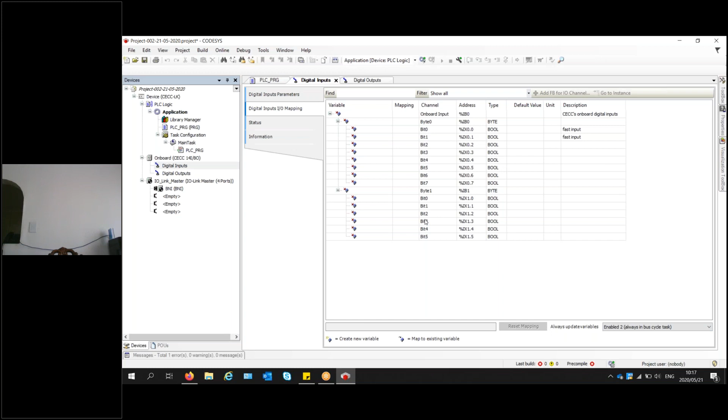What is important is that we need to select here enable 2. This is so that when we are logged in online, we can see the state of all the inputs, whether it's false or true, because otherwise by default it won't update unless such variable is used in the program. So we need to do the same thing with the outputs. Also under the remote IOs, we need to do the same thing. Enable 2. Now, the next step is also very important. You need to add symbol configuration.

Usually after adding symbol configuration, it requires you to build. Now, this is very, very important. You need to tick both of these here, constant and IO config globals. And also you need to go to settings and enable direct IO access. This is so that CIROS can access the onboard IOs of the PLC and also basically all the physical IOs. Okay, maybe I shouldn't use the word physical. Let us say all the IOs in the project with addresses.

Okay, so I'm just gonna leave it like this for now because I want to make sure that my communication is 100% before I start writing the program. At this point, I will start CIROS Studio. So this is what you must also note, actually, is that OPC, it is part of CIROS. After installing it, you don't actually need to do any settings, except for one, and this is one time. You need to set up here, Codesys settings, you need to select which version of Codesys you're using. Once you've done this, you don't need to come back every time and change it.

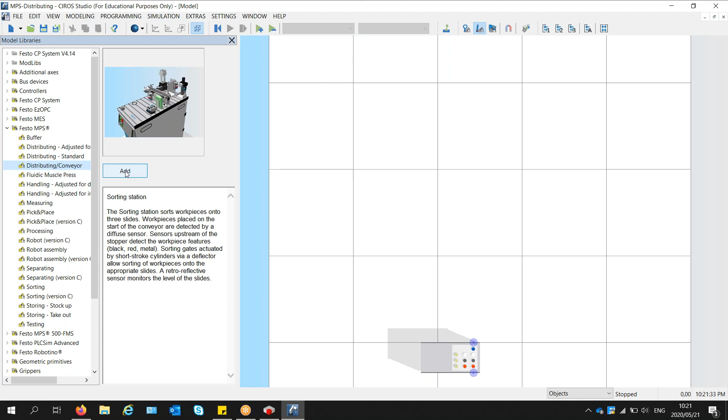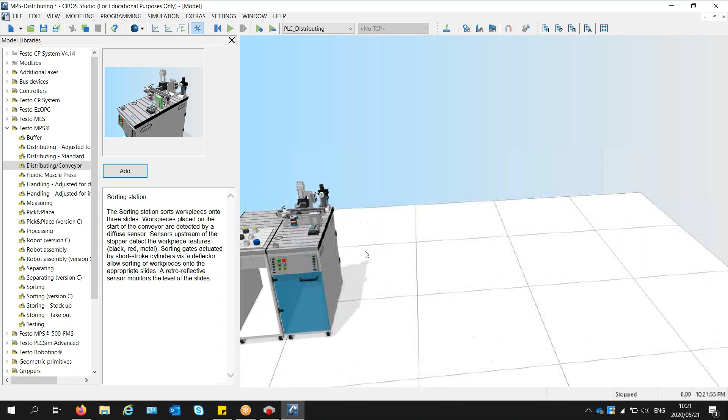So this is the model library. This is where you select which models you want to have in your project. Sometimes it's not shown. If it's not showing, you go to models and you can go to model libraries, and then it pops up. And now these are all the different things that you can add into your project. For the purposes of today's webinar, we're going to add the basic MPS station, which is the distribution conveyor. Okay, this is the distributing conveyor, and this is my work table where I will select the different materials to load into the magazine.

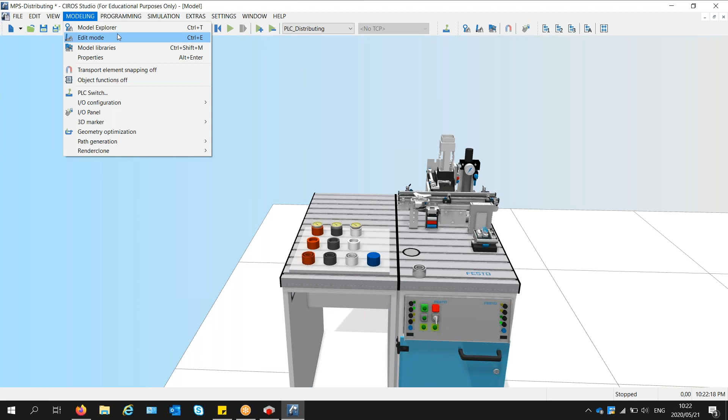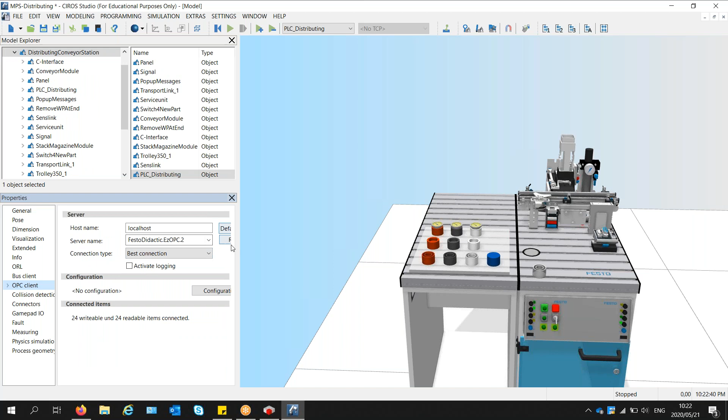All right, and now we need to go to the model explorer, and we need to go to objects. We need to go to distributing conveyor, the station, and PLC distributing. We need to go to properties of the PLC, and we're going to change this to OPC client. When you do that, this will then pop up under general. You need to go here, localhost, and here you need to select Festo EZOPC2, what is showing. Sometimes it's not showing anything. If there's nothing there, you need to refresh and you will have all the different things to select.

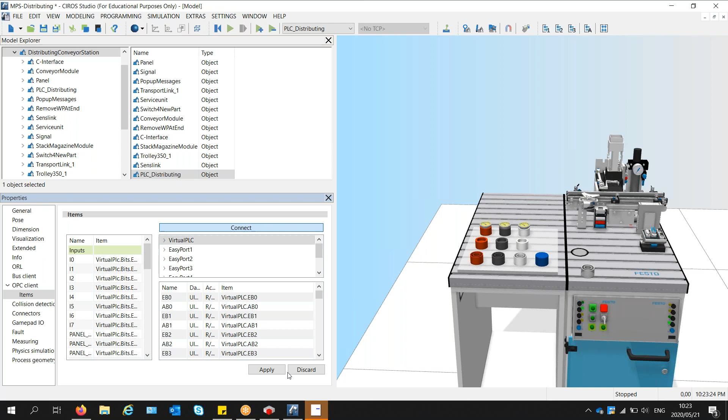Now, if EZOPC is not installed, it will not be an option here, which means that you will not have communication to Codesys from CIROS. So you need to install EZOPC, only then these options will be visible. Now, it's important that you select the correct EZOPC here, which is 2. And from there, you need to open here, go to items, and then you need to connect. You will see immediately when I click on connect, EZOPC will pop up, and apply. And that's it. Luckily for you, that's all you need to do pretty much in CIROS in terms of configuration. So let's run.

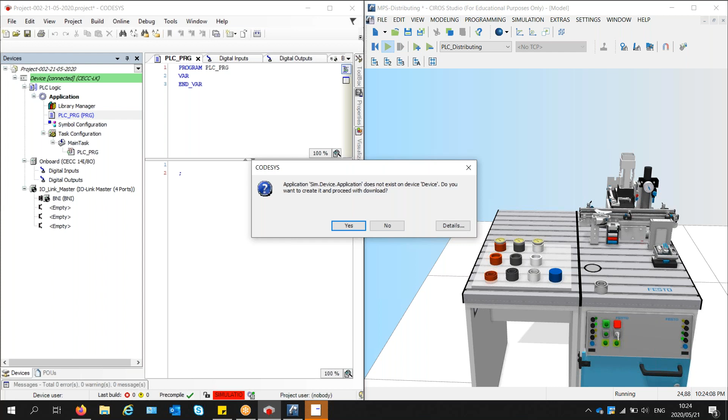In Codesys, what you must do also, you must turn on simulation. Once you've turned on simulation, you can then log in. Because as I said, we're not using any hardware. So by turning on simulation, it simply means that we are using the internal PLC controller of Codesys so that the project is loaded there instead. And then from here, you can run the project. So it's running. Let us see here.

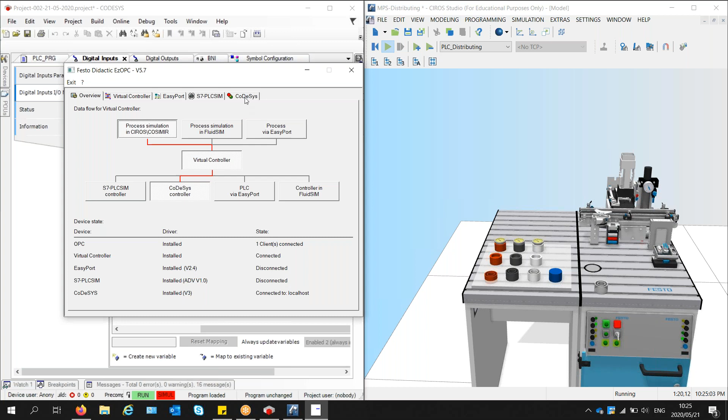Now, if this was communicating, already there are some inputs that are on the station. So I can tell immediately that there's an issue somewhere because none of the inputs is actually on. So I need to figure out why this is. So we're going to open EzOPC. It does show that Codesys is connected and we have one client. In this case, this is CIROS. So I'll go to Codesys and you can see that there's nothing. Virtual Controller, there's nothing. All right. I'm going to try to turn on an output to see if it will get to the station. Let's see.

There is communication, because you see that as soon as I turn on output number 4, the ejector came out, it extended. Let us check inputs again. Okay, there is something here, something has turned on. All right, perfect.

Okay, now this is where it gets interesting, because if we're going to write a PLC program, we need to declare our variables. We need to know what sensors we have. We need to give them titles so that when we write our program, we don't refer to addresses in our program. This is a very important thing to do.

Now for outputs, it's very simple, because you just turn them on one by one and see which is responding. So in this case, I've seen that as soon as I turned on output number 4, the ejector came out. So I'm gonna make it false here. What have I done? This is inputs. Okay. We need to go to outputs and we need to make this false. So this is output number 4.

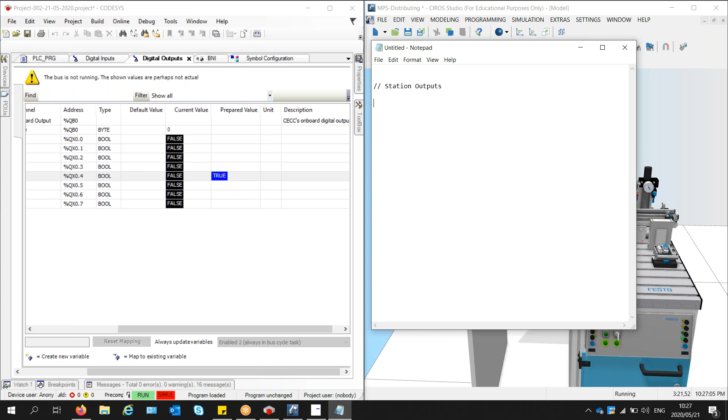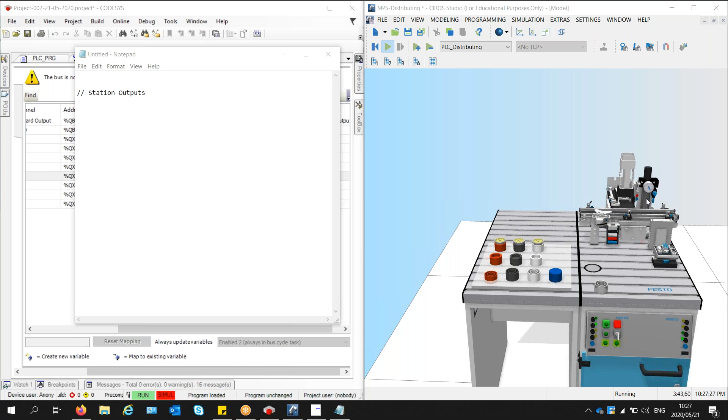The first which I've identified is the ejector. So you can use the term ejector, or you can standardize and use the similar terms which are used in CIROS in terms of the labels, which are also printed on the physical outputs themselves, which is something I recommend, because this is going to be very helpful if you're going to be doing any troubleshooting in the future.

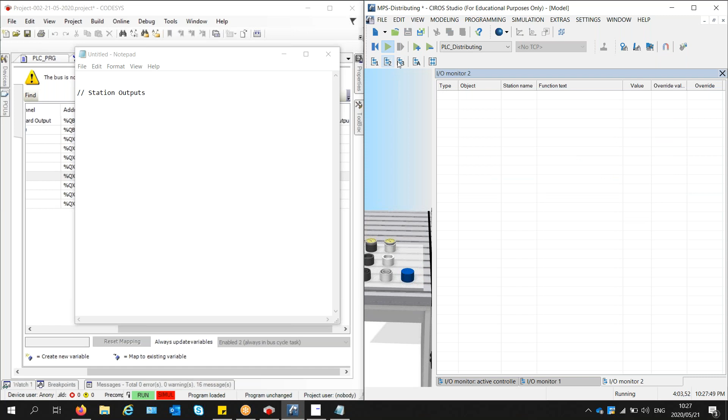And also, these are the same terminologies that are used in the circuit diagram of the station. So you can see immediately why I'm saying what I'm saying. So you can see those labels that I'm talking about, these G1, BG1. So this is something I recommend for you to use. But in this case, our outputs are not given labels, are not physical in CIROS. So if you want to get those labels, the student would need to refer to the circuit diagram.

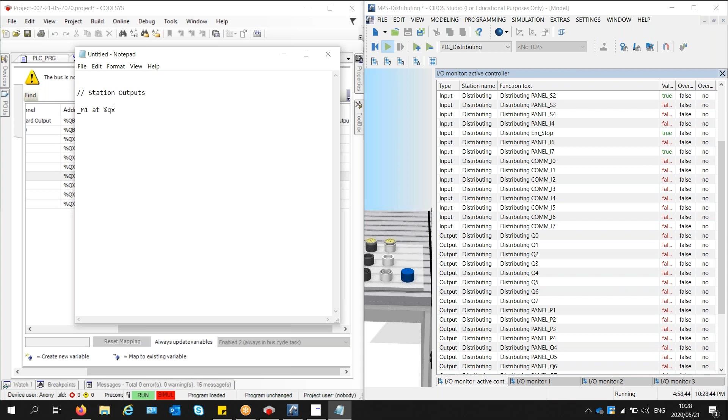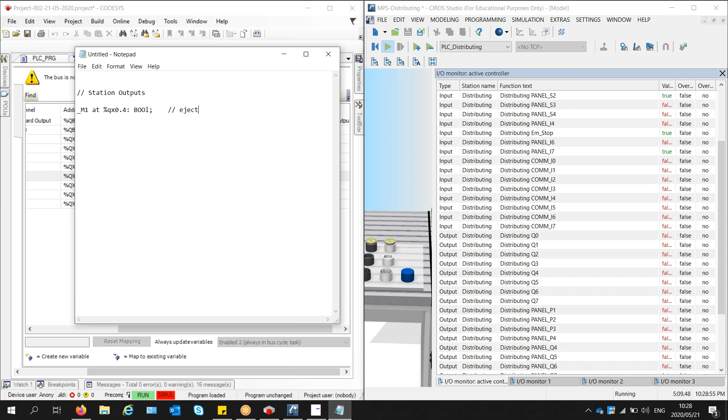But to not make my story too long, I will skip that, and I'm going to say M1, for instance, for the ejector. Okay.

Let's see what other outputs we can find. So 0 is actually a conveyor, but we can't see anything because we don't have any material on the station itself. So I'm going to load a workpiece and eject it so that we can see if indeed output number 0 is the conveyor. So you can see that the conveyor runs forward when I turn on output number 0. So I will write it here. I'll use K to refer to motors and M to refer to valves or solenoids.

Okay, so we've seen the conveyor running forward. I'm going to turn it off, turn on output number 1, turn it off. There's nothing there that we can see. So let's turn this on. Output number 2 is the gate. So this is the gate here.

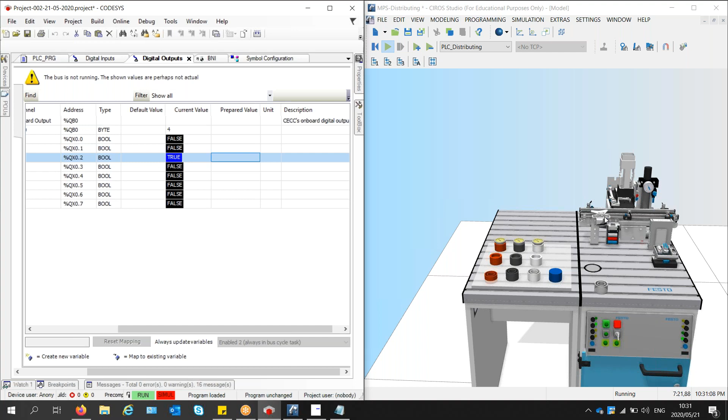We don't even need to include it in our program because it will not have any effect, but I'm going to declare it anyway. So that is output number 2. Looks like I forgot X here. Stopper. Okay.

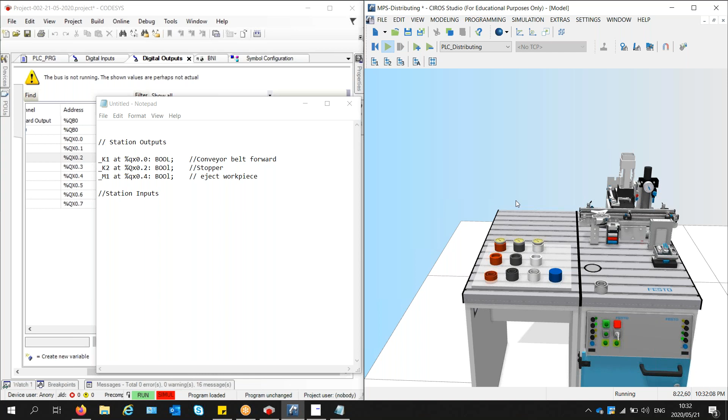So for the inputs, like I've mentioned in the previous session, it's very tricky to identify inputs with the station, because it's not like with a real station where you can go physically, place the workpiece, have it stop there and observe which sensor is turning on. So that is the reason why, if you look here, the labels of each input are shown to the students. But for the outputs, it's not shown, because this is part of them learning how to identify the different variables. So inputs are here.

So I'm just gonna type them in here quickly. And we have G1, BG1, in capital letters, which in this case would be at address 0. So the first input here would be address 0, then address 1, 2, 3, 4, 5, 6, and 7. All right, so this will be at %IX0.0, and this is a Boolean.

And so this is a comment. Let's say beginning. So we also have G1, BG2, which is workpiece at middle.

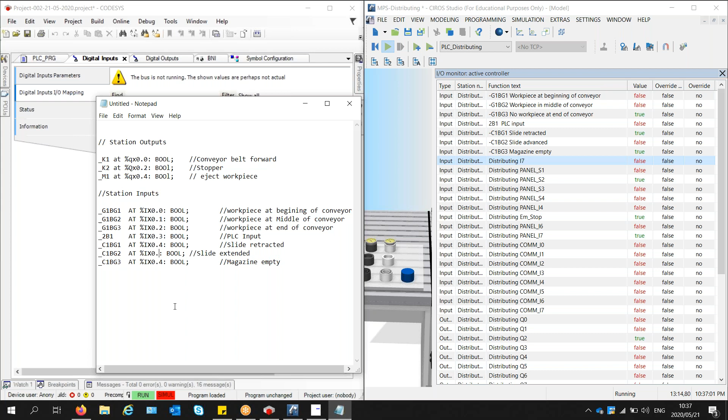So we have C, what have I done? We have C1 and BG2. Tab, paste, and this is slide extended. We have magazine empty also, which is going to be C1 BG3. There we are. So I'm going to stop here in terms of declaring the variables. We will look at the panel later on. Okay, so let me just make sure here. So this needs to be 5 and this needs to be 6. Number 7, I'm going to skip it because it's also a reserved variable.

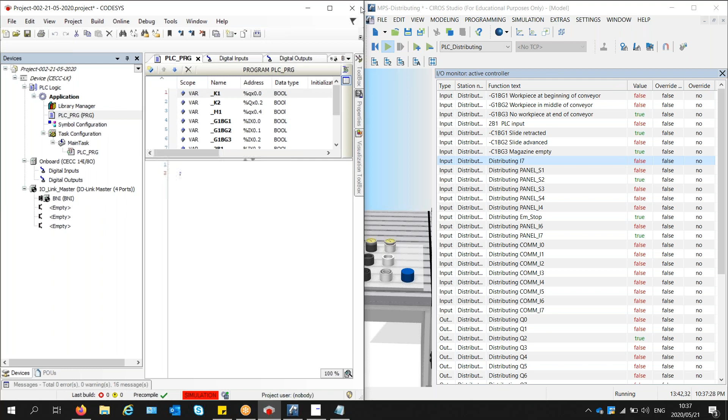That's about it. So I can take these now, and now I can log out. And I can put them here. And so I have conveyor belt. Yes, now I can start writing the PLC program. So I'm gonna just have an internal flag that I'm gonna use to start the system. So that I can have a start.

Now, I hope that you might be familiar with this type of programming. Codesys structured text. It's not exactly the same as the Siemens structured text. There are some minor differences. But if you are not understanding something, I'll be more than happy to explain to you. So we're gonna use steps. This is just to make sure that we don't have clashing signals or interlocking signals.

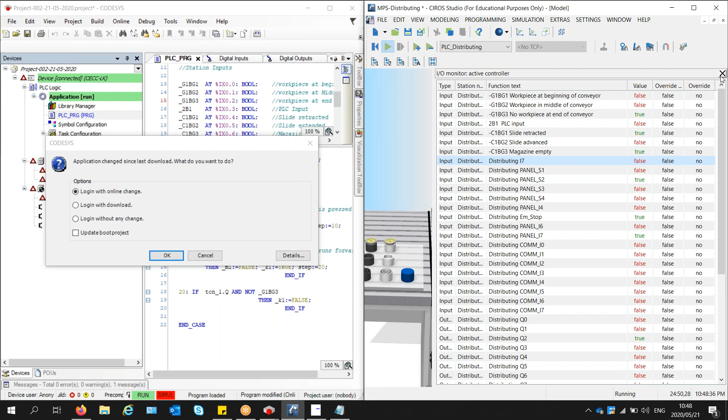The program is complete. I hope that we won't have any errors here. I didn't move these things. This should not be here. Then yes. If then okay. Perfect. Okay, so we will then test this small brief program. So I need to load a workpiece into the magazine.

Okay, there we are. So this is what I meant. You can see that it takes me a while to change the state of a variable. By the time I change start to false, the process has already completed. And if I don't use a trigger, this will become continuous and I can't stop it until I make this false. So the trigger helps me simulate a momentary on-off. And another workpiece will be taken out only after I trigger the process again.

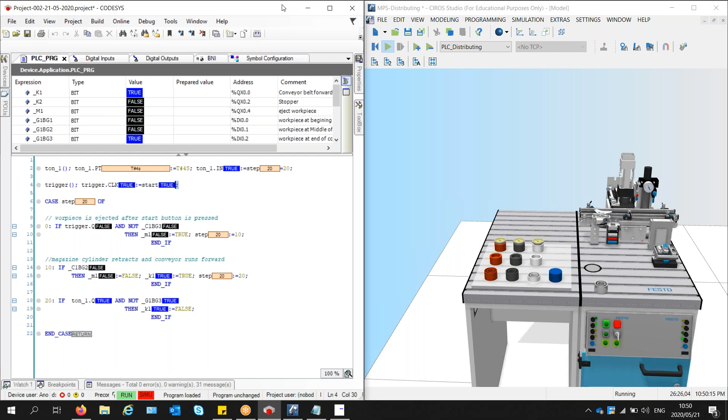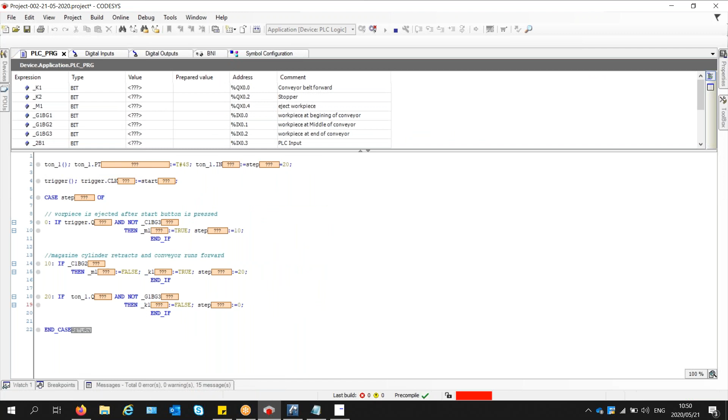It won't start a new process, and this is because it's stuck at step 20, so I forgot to write here that it should jump to step 10 after this. Actually 0. Oh, here we are.

Let me just check under chats. I haven't checked chats in a while now. Well, there's still no new chats.

Now I can continue to declare the variables on the control panel. But I would just like to get a response from you so far. Is everybody good? Is everybody happy? Everything is well explained?

Yes, thanks, Treasure. I still haven't managed to download the software. It's probably because I'm streaming the webinar at the same time. The download is taking forever. But yeah, thanks. It's looking good. It's also good to see Codesys programming. I haven't done that yet. Thank you. Let me continue then.

So I will send you this project after the webinar, and then if you want to check something, you can check so that you're not completely in the dark. As I said, you don't need to make any changes in Ciros, you just open this model, which is the distribution station, and then you go to OPC, you add EZOPC2, and then run simulation, and that's it. So this is really a positive thing.

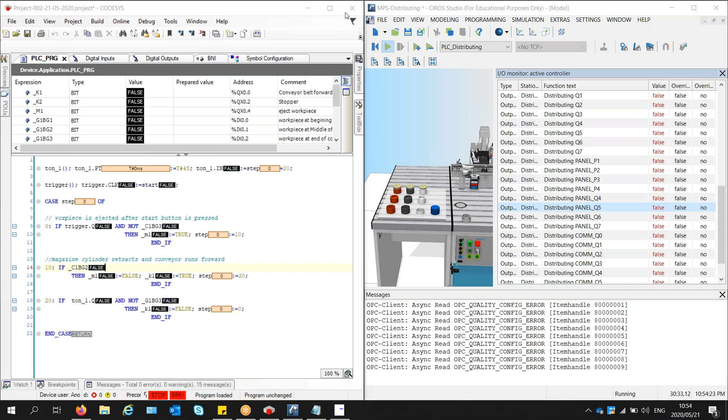These are for communication with other stations so that you can connect via lab cables to downstream and upstream stations. All right, so we will go back to Codesys now to declare these things. So I'm going to log out. Let's start with the outputs, because we started with outputs with the station. And here we have P1 is the first one.

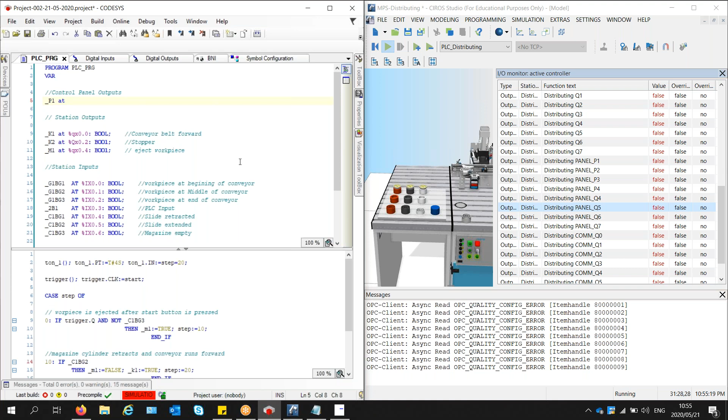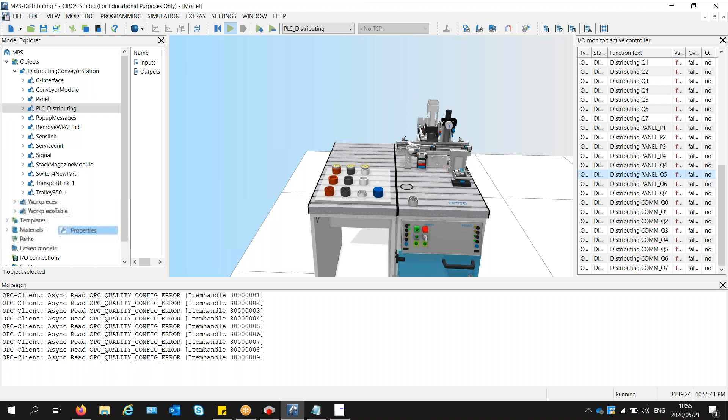So also here, we need to know the address. So before I start writing addresses there, let us verify the addresses of these variables. So I need to go to Model Explorer and PLC properties. Okay, so you can see here S1 is byte 1, bit 0, and so on. So this is using byte 1. Let us confirm also the outputs. So outputs are also using byte number 1. This is good.

There's just only one problem, unfortunately, which I will explain to you in a moment. So now the PLC which we are using comes with 2 bytes of inputs. Now the second byte is incomplete because physically on the PLC itself, we have 1 byte, which is this, of course, with 0 to 7, and we also have byte number 1 with only 6 inputs. Now this is normal because PLCs usually have more inputs than outputs. Usually systems have more inputs than outputs,

and I think it's something. It's a good thing. It's a good thing because you want to listen more than you speak, actually, so that you gather more information before you can make decisions.

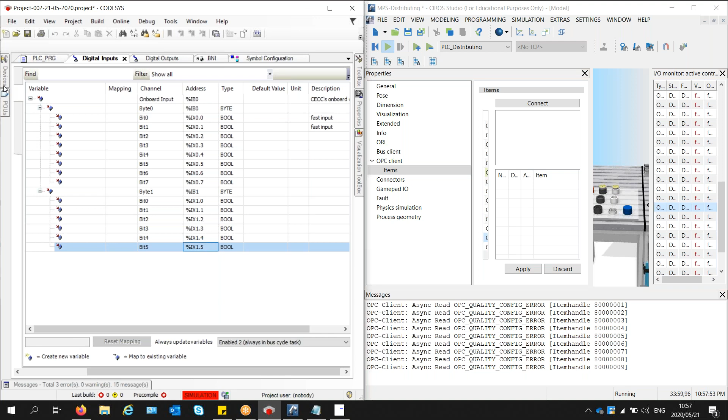Now, this is not good for us because of the fact that we could be having bit 6, bit 7, which we don't have here, right? But for the control panel that we're using, luckily inputs 6 and 7 for this activity we're doing now, we won't need to use them. However, should you find yourself needing to use 6 and 7, then let us see if you have them here.

There's also another reason for having more inputs than outputs. Outputs are expensive, inputs are cheap, simply due to the electronics involved. An input is simply a transistor looking for a voltage, whereas an output often needs to drive power, and the power electronics behind it are a lot more expensive than the inputs. So that's why PLCs usually have less outputs than inputs, and why you need to use expansion boards. Thank you. I didn't know that.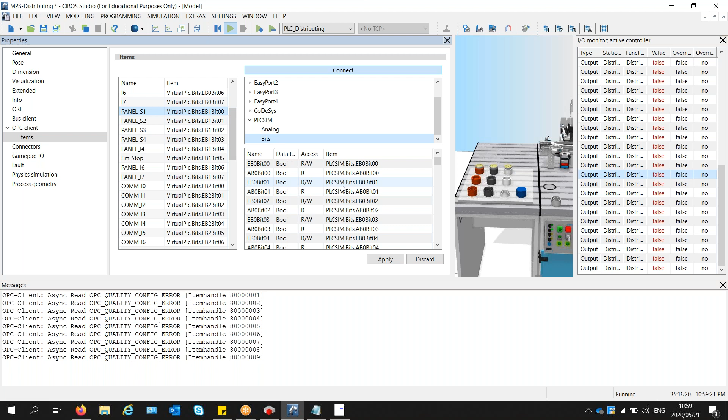So one simple solution I can give you is to change the byte of the inputs of the control panel here. So you can change these to byte 2, because with byte 2 we have complete bits from 0 to 7. So you can do that by going here and coming to bits and just dragging byte 2, bit 0, and dropping it over there. So you can do that. But I think I've emphasized enough on that.

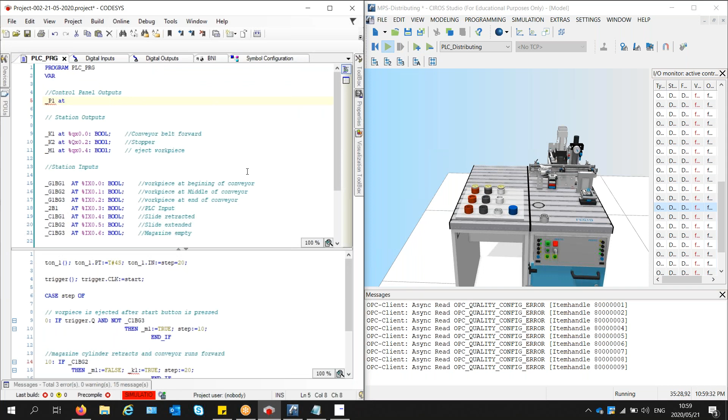Let us continue with declaring these. So P1 would then be the start illumination, which will be at address %QX1.0. This is the first output on byte number 1, and this is of course a boolean or a bit, and this is a start button illumination.

We have P1, P2, P3, P4. So I'm going to change this to 1, 2, 3, and we have start button illuminator. This is a reset button illuminator here, and then we have Q1 and Q2. Now we come to the inputs.

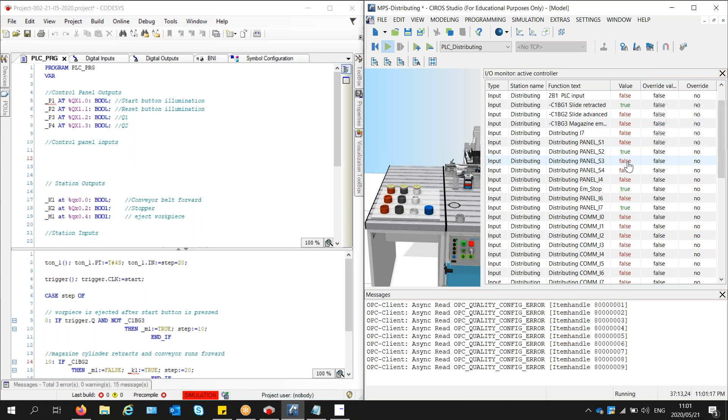So all inputs are labeled S1, S2, S3, S4. Because we don't have an emergency button on our station, we will leave that out. So we'll only do S1 up to S4 here. S1, it's %IX1.0. So this is the start button.

This is stop button, this is reset button, this is automatic manual. So start, stop, and then we have reset. I'm not sure which comes first, whether it's reset. Oh, yes, it's reset. Reset, and then this is a switch here. This is automatic manual switch.

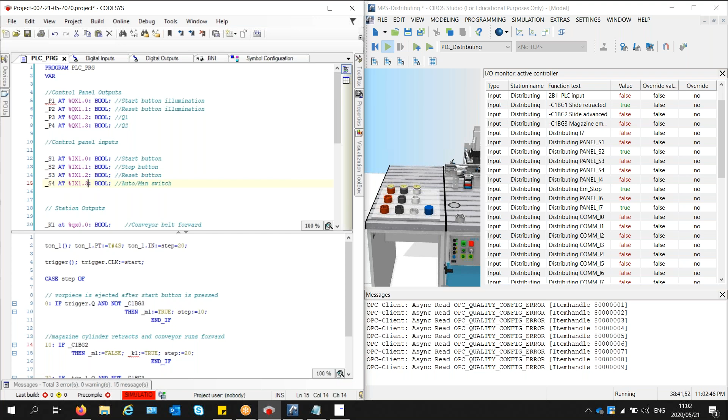There we are. Now you will see that although our program runs, there are some situations. For example, it could be that I stop simulation while the cylinder is extended, and when I start to run the PLC program, the system is not in initial position. What happens? My program will not work. It will just freeze. I'll have to stop it and disconnect air, or rather do the manual override on the valve so that I can retract the cylinder.

This is obviously not something possible with a simulation. Here, the only thing I can do is just to stop and then start again. Everything will start in initial position. That is the difference between virtual and real system. But what is important is to include this in our program so that we can reset the system. Imagine that you have a plant of 100 square meters. You're not going to go to individual valves and do manual override to reset them to initial position. Your program needs to do that. So that is something that you will of course have to program.

And so you want to stop the program if there's an error or an emergency situation, then you need to stop the system. Or if you want to do some modification, you need to stop the system. And automatic manual basically is a key, which is important. This is the key which you can detach from the station so that there's no unauthorized operation of the system. Unfortunately, virtually, I cannot disconnect the key, so it's always there, but we will role play that it's possible to remove the key.

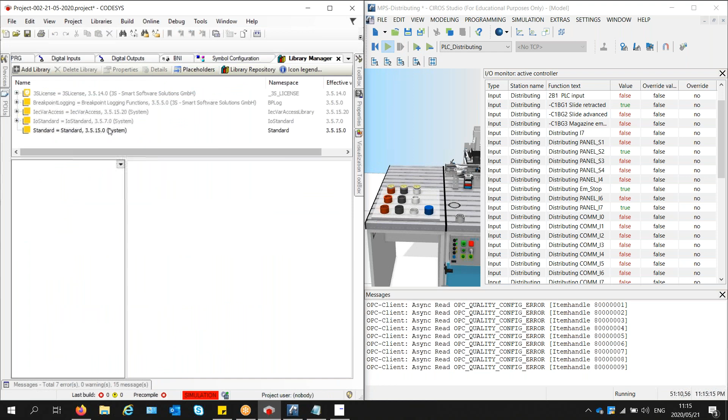And not magazine empty, and cylinder retracted. Just like this, we can then start flashing the illuminator. Now, for flashing features, you need to add a library we call UTIL, the utility library. This will make the advanced function blocks available.

We're going to call it flash start, so that I can come here and say then, once all of these are true, I need to equate P1, which is the start illuminator, to the output of the blink or the flash. But also I need to define the duration of a high and the duration of a low. I also need to define what starts this function block, and I also need to call the function block. So I'm going to call it here.

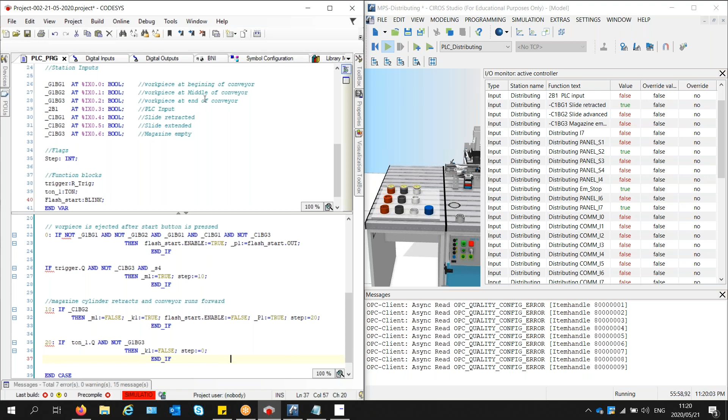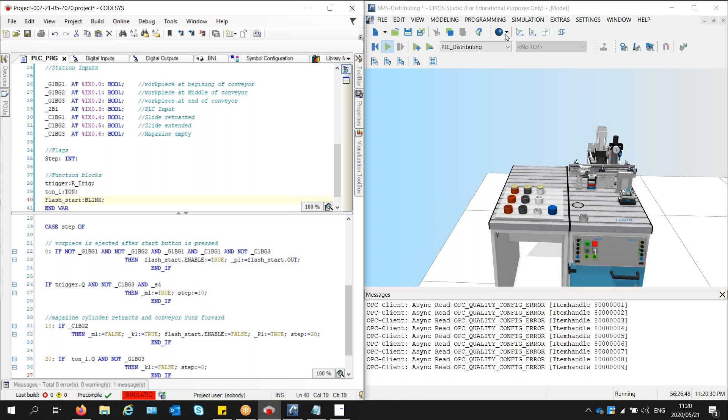And I think I will stop here, because if I have to include every other illuminator, then the program is going to be so big, and I can imagine for you that are not the authors that it's probably already starting to become convoluted, and you might be getting lost, and I don't want to make you lost even more. So I'm going to stop at this point and not expand on the program any further.

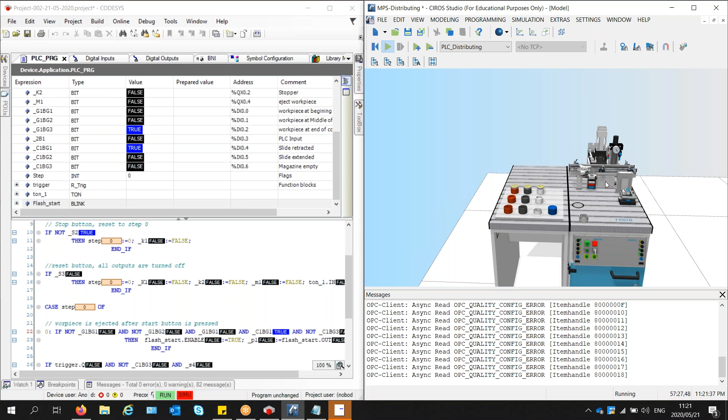Okay, so now here we have, this is good, this is false, false, and BG1 is false. What is this thing here? This is conveyor workpiece at beginning of conveyor. So I should have written not, because workpiece at beginning of conveyor is also a light barrier, which, let me confirm what I'm saying first. No, it's not. So if it's false, then I don't know why, but I'm going to just change it here to a not, because it looks like it is wired somehow. So I'm going to change this to a not.

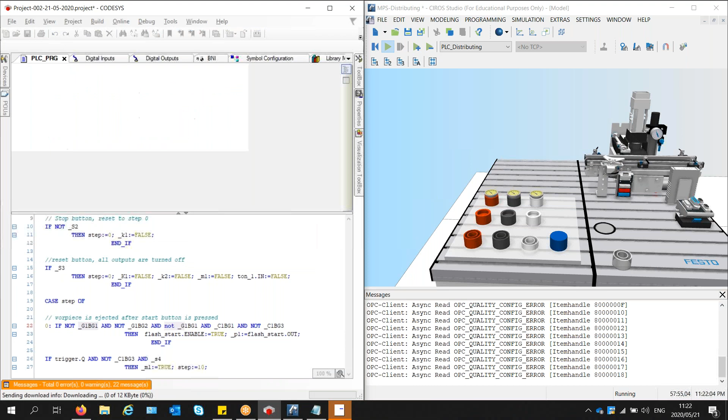So the start button is now flashing. So I'm going to load a workpiece, and then we will see if it becomes solid. There we are. So it hasn't started for some reason. Let us see what's going on. So we're still in step 0. If not, yes, and GB1 and not, this is perfect.

And also we come to, oh, okay. Trigger, so this is the output of the trigger, and the trigger is linked with S1, which is the start. So we're using the trigger output. Let's see. S1. I'm going to get rid of the trigger because now that I have the ability to press it momentarily, I can omit the trigger.

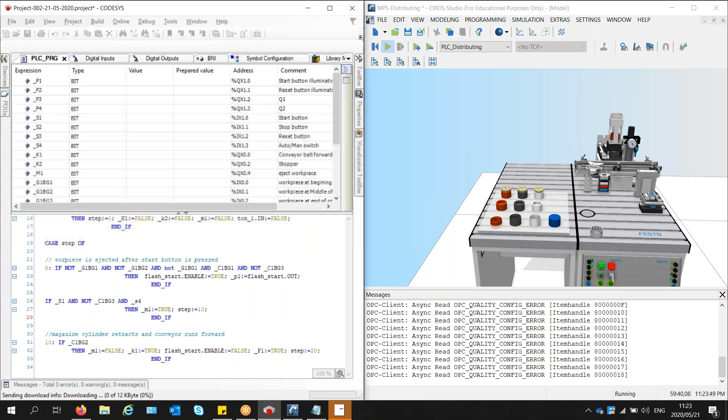Yeah, we're still stuck at step 0. So start turns true and S4. S4, we said that S4 is automatic manual. So I need to turn it to automatic first. So it is now in automatic, but still S4 is not true.

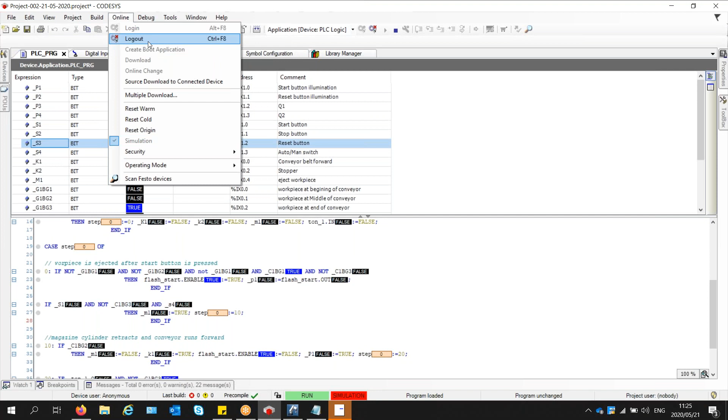Can you see that? So S4, which is the switch, needs to be changing state, but it's not. Instead, S3 is changing state. Which simply means that my addressing was incorrect. So let us press reset and see. Reset responds to automatic manual. So I need to update this here because I didn't address it correctly. S3 and S4 are vice versa.

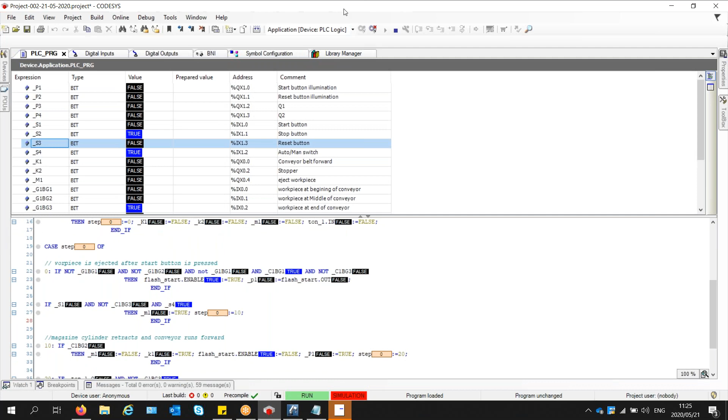No, I just need to change here. So this becomes 3 and this becomes 2. Yes, just like that. Let's see if this will get it to work. So indeed, now this is good. So now the start illuminator is on, it's flashing, now press it, it becomes true. There we are.

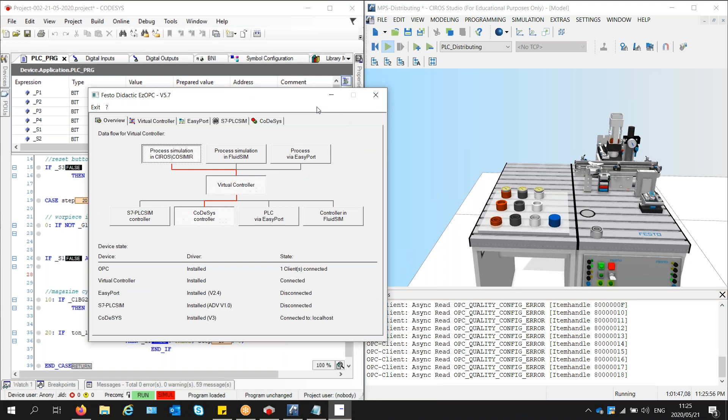Okay, that's about it. I don't want to go further with the program. As I said, I will stop at this point, and it's good timing also because now we have 34 minutes remaining. Now I would like to engage with you further about this.

Some of you were busy downloading as I was presenting here. If you were able to install and do something on your own, or if you were writing this program as I was doing it, tell us if you're having any errors, and let's see how far we can get you to get to this point.

Yeah, and also just feedback from you. How did you find this tutorial, if I may call it, and how do you find the solution altogether? Do you think that this is a good solution in terms of simulating programming hardware in a simulated environment, or do you think this can be a suitable solution for you? The floor is yours.

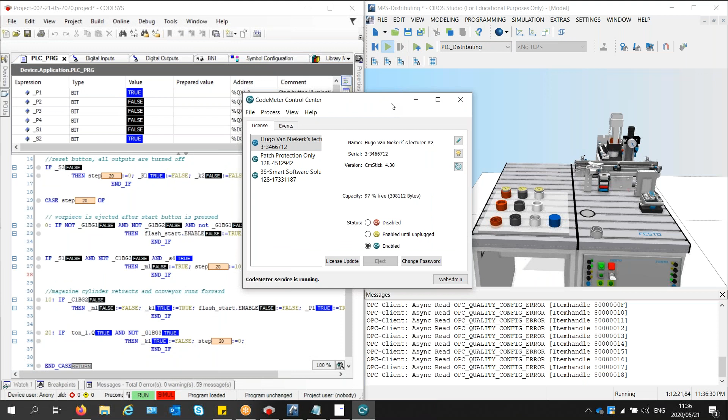You go to add server, and then type the IP address of the server computer or the name of that computer, and then you add it. Just that, and then you will be able to run Ciros on that network license. Okay, then it will do the searching by itself, locating the license? Yes. Same thing for FluidSIM hydraulics, FluidSIM pneumatics, same procedure. Okay, that's good. So during this procedure, will I still need the VPN to be set up, or can I just...

Yes, because without VPN, what's going to happen is that when you punch in the IP address in CodeMeter, and you're connected to a network, whether it's Wi-Fi or telecom, whatever, it's going to look for devices on the internet with those IP addresses. And you can imagine that on the internet there are thousands and probably millions of devices connected. So the chances of it finding the correct one are like trying to find a needle in the sand. You know what I mean?

So VPN is a virtual private network, which simply means that when CodeMeter looks for this license, it will search specifically in that private network, where the private network will be UJ computers. So that minimizes the amount of devices. That way it will find the license quicker and more efficiently. All right, it's not a problem. I'll try to inquire with my guys, Buma, Shudu and Stan, and then I will take it from there.